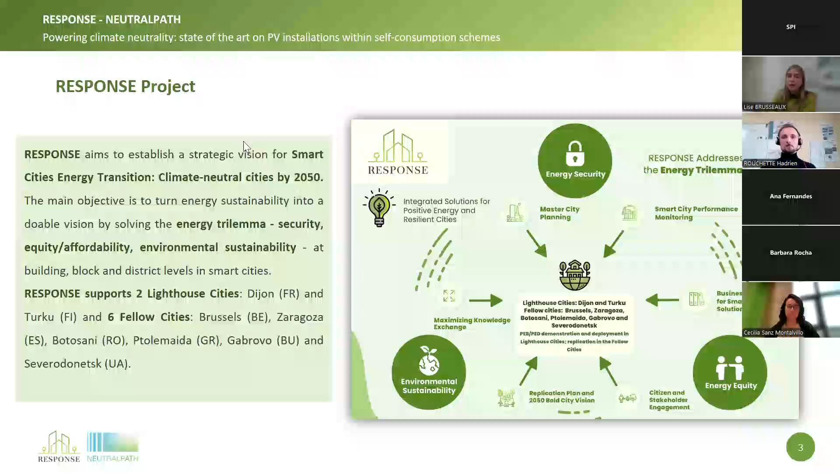Now I will very quickly give you an overview of the two projects to give you a little bit of context. So first, the Response project takes a comprehensive approach to urban transformation, addressing energy systems, digital tools, and citizen engagement. The project started in October 2020, and it supports 54 partners in 13 European countries, including 2 lighthouse cities, Dijon in France and Turku in Finland. These are 2 demonstration sites which test innovative solutions for the implementation of PEDs.

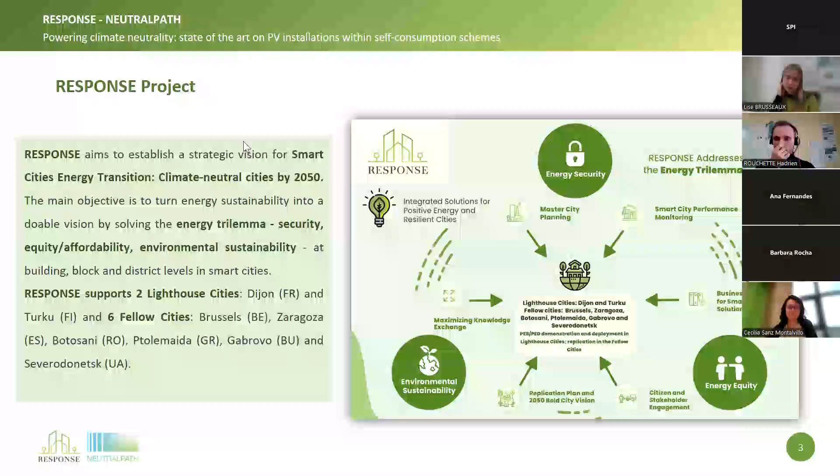It also supports 6 fellow cities: Brussels in Belgium, Zaragoza in Spain, Botoșani in Romania, Ptolemaida in Greece, Gabrovo in Bulgaria, and Severodonetsk in Ukraine. These cities will make replication plans based on the experiences of Dijon and Turku.

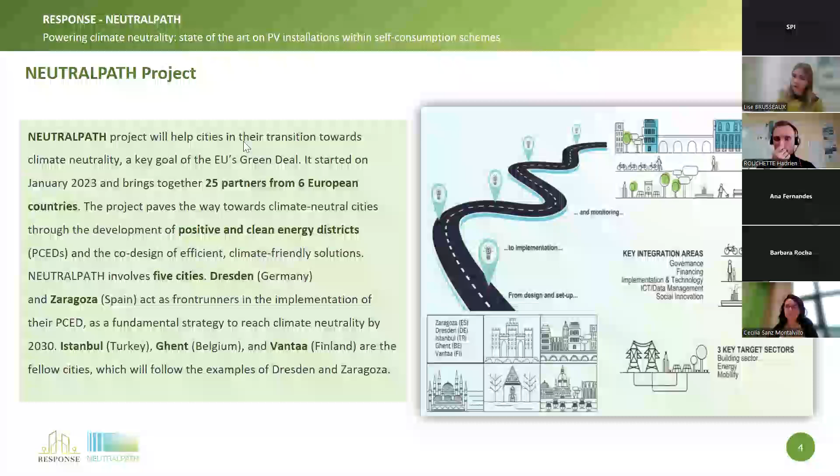We'll also hear today about the Neutral Path project, which focuses on enabling cities to transition toward carbon neutrality by creating PCEDs. As with Response, the project combines cutting-edge technology, urban planning, and community involvement to create practical solutions and reduce emissions while improving quality of life. The project started in January 2023 and brings together 25 partners from 6 European countries.

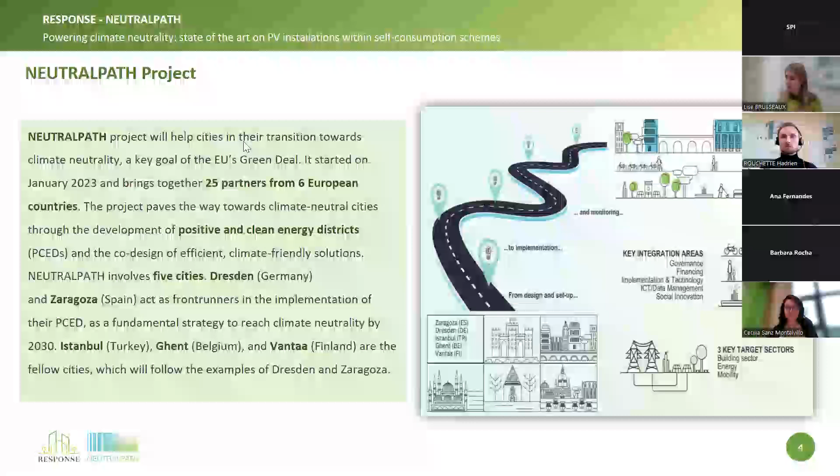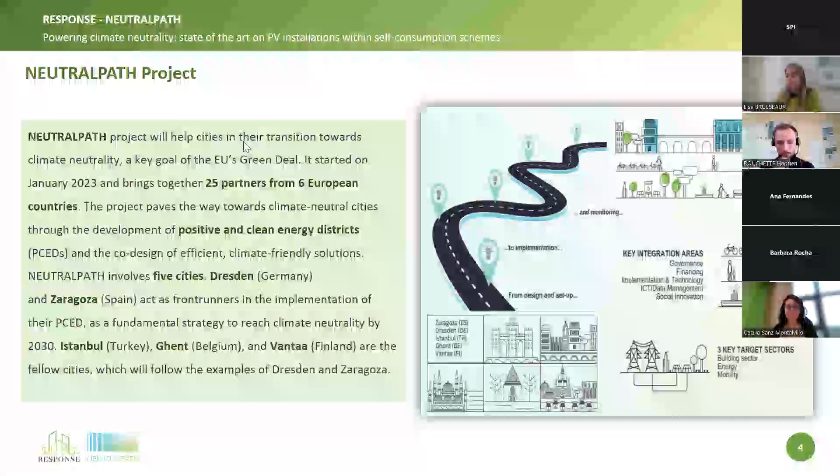It supports 5 cities: Dresden in Germany and Zaragoza in Spain are the pilot sites, the front runners in the implementation of PCEDs in this project. It also supports Istanbul in Turkey, Ghent in Belgium, and Vantaa in Finland, the fellow cities, which will follow the examples of Dresden and Zaragoza in the frame of Neutral Path. So that's it for me.

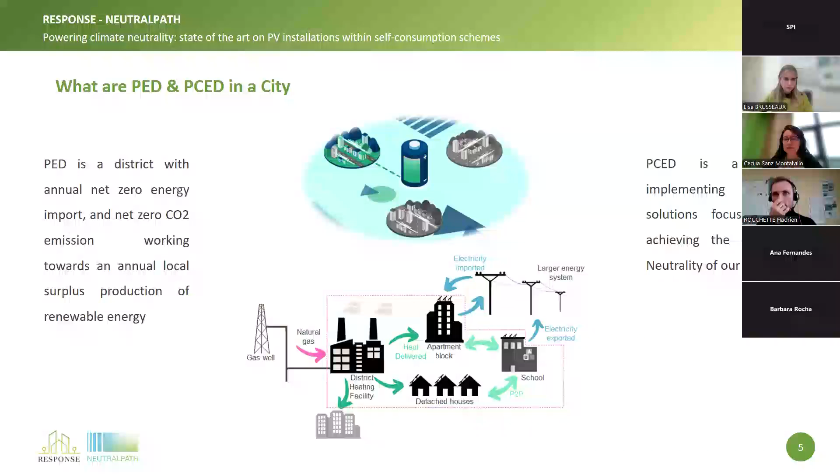Our cities could have or should have been thinking in these commitments with the Commission on it. So this climate neutrality is helped by our PEDs and our PCEDs, because we use clean energies for these districts. The positiveness of the districts should be achieved with renewable energy sources.

So this reduction of fossil fuels contributes to climate neutrality, and also the PEDs themselves, as their surplus can be used by other districts that could not implement this kind of clean solutions, also could help the neutrality of our city. So maybe in the future we could talk about positive energy cities, but for the moment we are talking about these positive energy districts. And this has been what our cities have done.

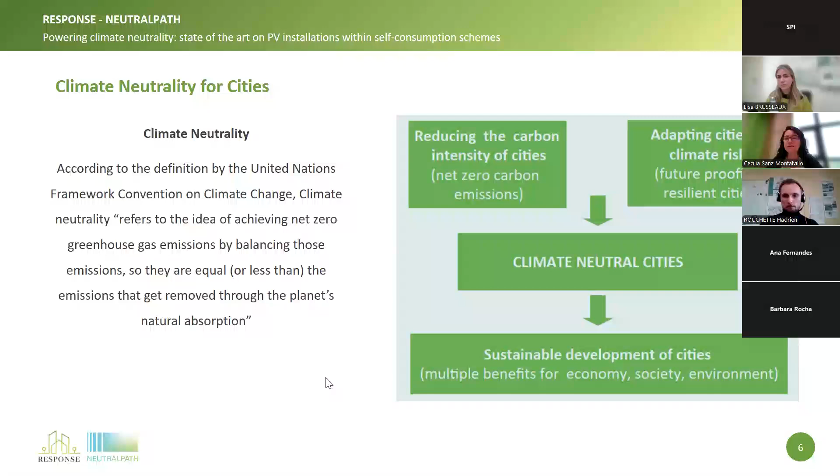Next slide, please. And for talking about how our cities have worked, we have today 3 speakers, all of them focused on PV solutions, because surely solar energy is one of the main energies to be considered in these PEDs and positive energy districts. And we will have Clara Lorente from CIRCE and from NEUTRALPATH from the Zaragoza side talking about how these PV solutions have been integrated in the city.

Later, we will focus on the Turku experience with Hugo Huerta about how this energy can be managed, so apart from being installed, it can be managed with other energy solutions. And later, with Hadrien Rouchette from Dijon métropole, we will talk about how we can replicate in other parts of the cities what we have done in one of the districts. So this would be summarizing what we have done. So now I would leave the floor to Clara Lorente to talk about the experience in Zaragoza.

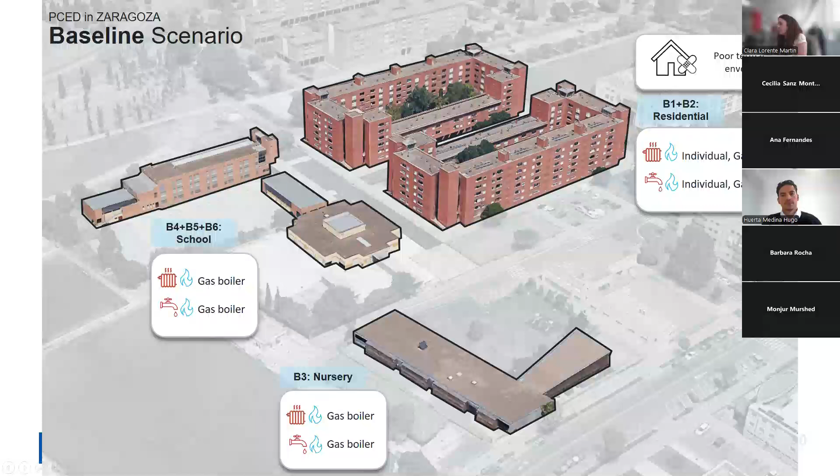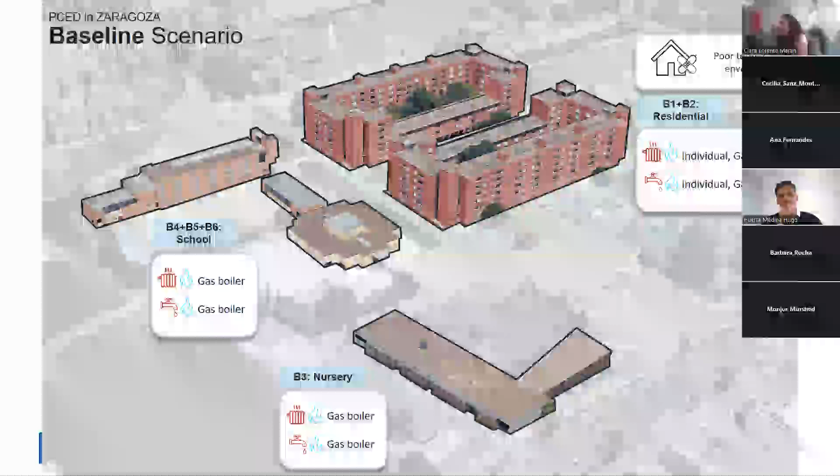I will begin with a short overview of the district. In Zaragoza, we have 6 buildings that are part of the district that is going to be positive and clean. Nowadays, all the buildings are provided with gas for heating and domestic hot water services. We have 2 big residential buildings, one school that is composed of 3 buildings, and then we have a nursery, and all of them are now provided with fossil fuels, with gas. So our intervention, next slide please,

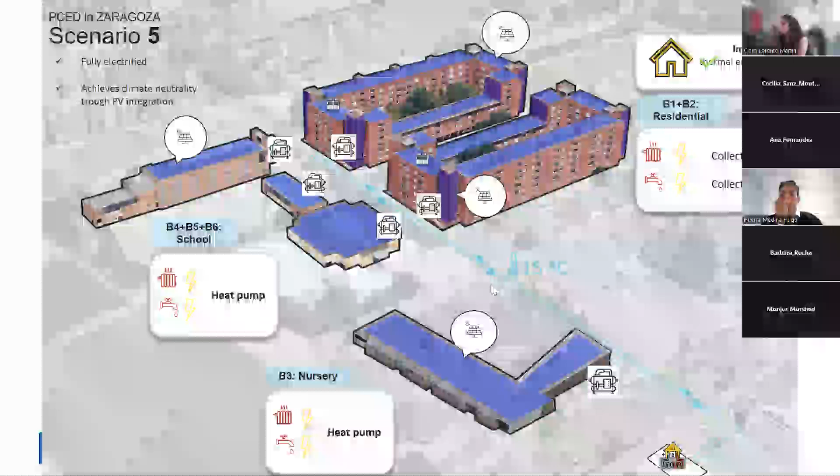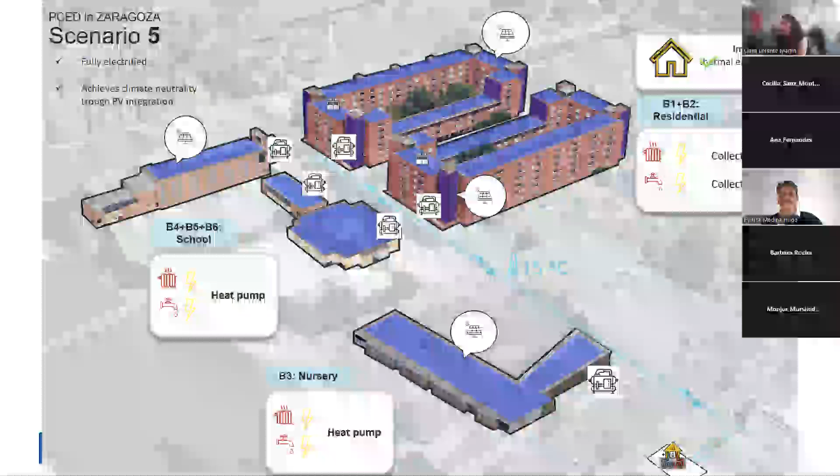focuses on first changing the energy sources to an all-electric district. And to achieve this, we are implementing a district ring that is geothermal. So we are taking water from the soil and then using it as a source for heat pumps that are water to water, and that way we can provide heating and domestic hot water for all the buildings in the district.

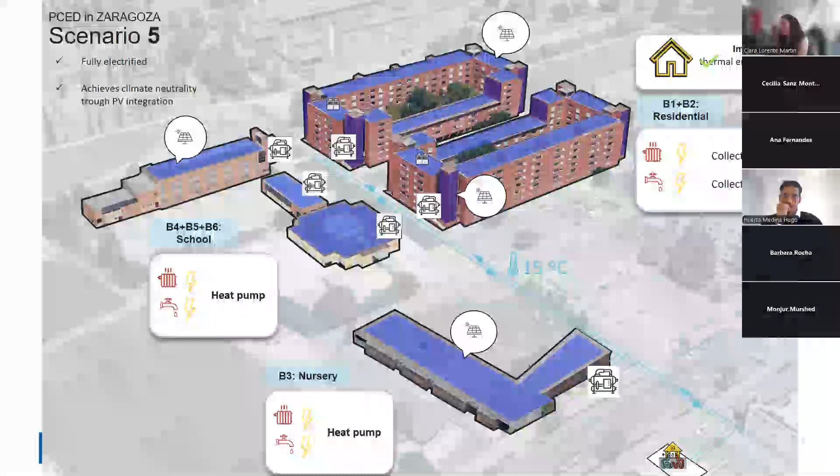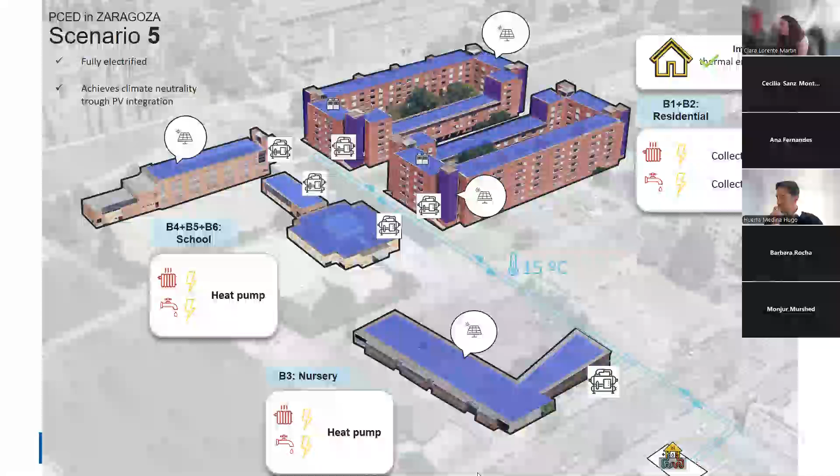These electric heat pumps will be using the energy that is locally produced in the PV panels that will be placed both on the roofs of the buildings that are part of the district and also on the facades of the residential buildings, the ones that you can see in the upper part of the image. Those are the red buildings. And this PV integration, the most interesting part, I think, is the PV that is integrated in the facade. So I will focus my next slides on this. Next, please.

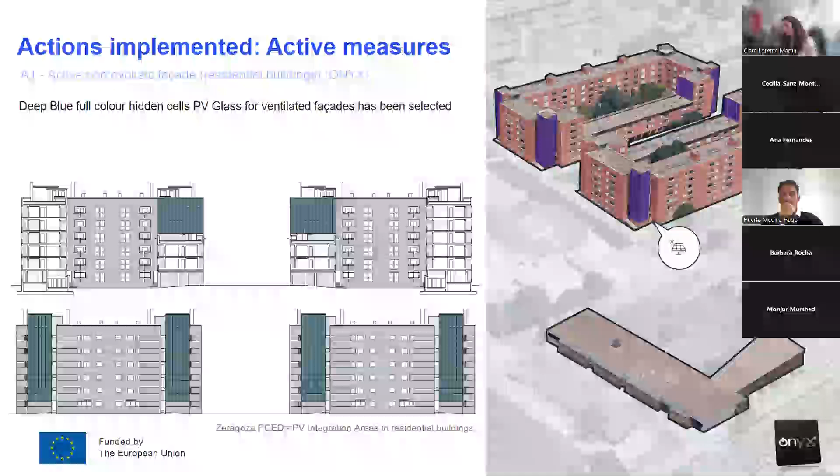Yes, so the PV integrated modules are part of the new facade of the building. We are using PV panels that are provided by one of the partners of the NEUTRALPATH project, that is Onyx Solar. The action is to install these panels in a vertical position in the facade of the building, and the placement for these panels has been chosen in very specific parts of the buildings where this is technically viable and aesthetically appropriate from the owner's perspective. And the panels are, next slide, please,

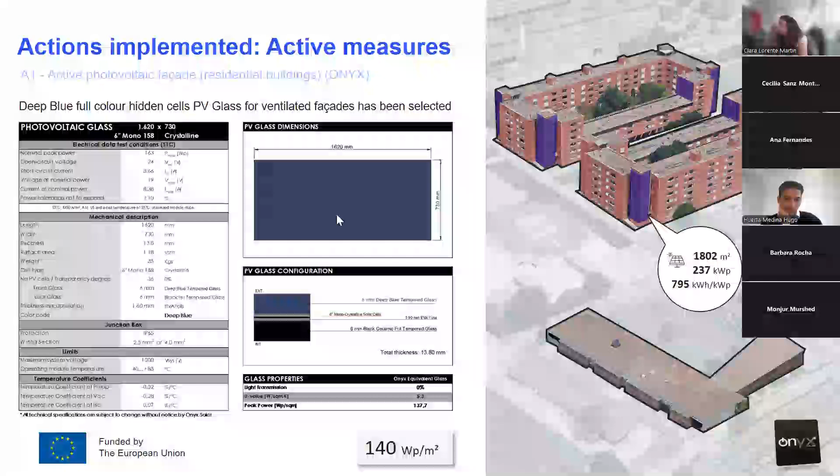a commercial product that is prepared to be installed as a ventilated facade. This here is the technical sheet of the panel. It mainly has a power per square meter of 140 watts per square meter, and in total we are going to install 1,800 square meters in all the building, which will make around 800 kilowatt hours throughout 1 year. You will see that for this specific building, it has been chosen to install the panels on every side, and not only on the south facades.

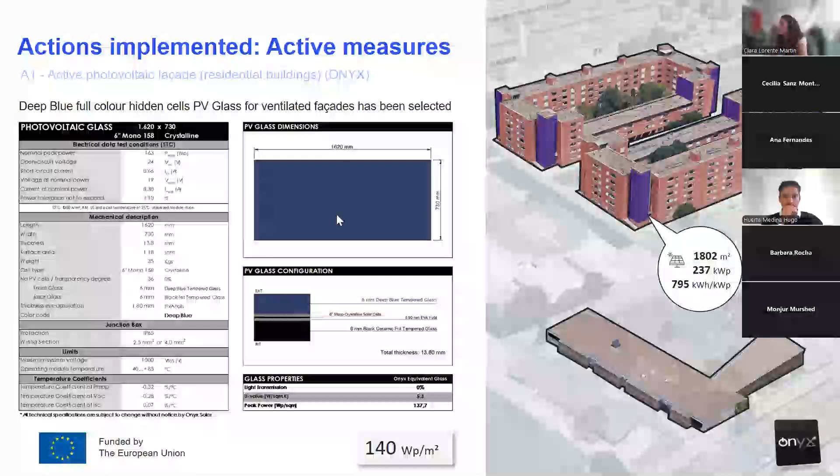And the reason why is mostly the architectural integration of the panels. So we will assume that some of the panels will produce more power than others. But this has been decided because architectural integration has been an important part of the solution. Next slide, please.

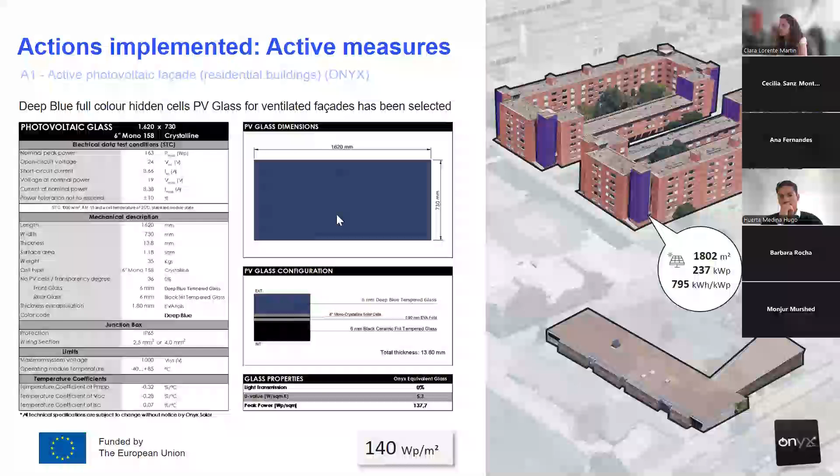Why should this be implemented? Well, these kinds of panels allow for an innovative ventilated facade solution that can combine electricity production with a facade element. So if you choose this kind of technology, you can adapt and install this kind of renewable solution into an element that otherwise you would need to install anyway. So you are solving two things with only one product.

So that way we can combine facade finish and electricity production, and fewer materials are needed. So we have a relatively lower embedded carbon footprint. And also these panels can allow things like shading on the thermal envelope, which is really important in southern countries of Europe. This can reduce cooling demand up to 50%. This depends, of course, on every building, but this is one of the main things that are interesting.

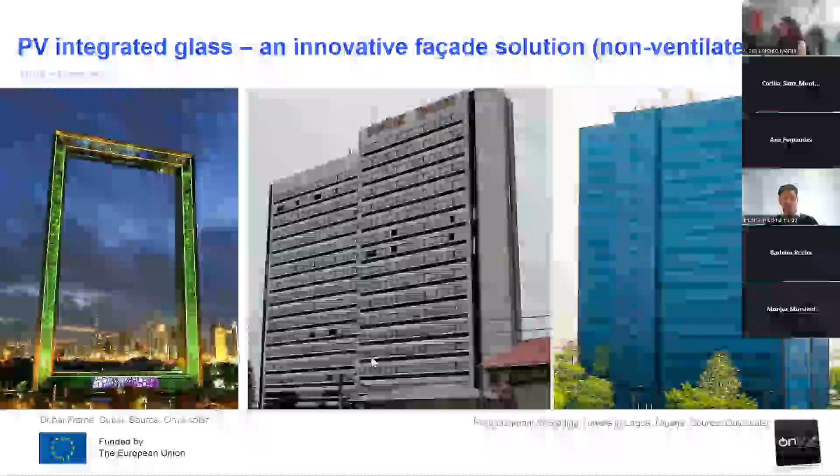This kind of PV facade can also be integrated as a non-ventilated facade, and here we have some examples of this. For example, the Dubai Frame building has this kind of facade that is also photovoltaic, and it can also be used as a refurbishment option. For example, we have here an example in Nigeria that was used to refurbish an office building. And next, please.

Now focusing on lessons learned and challenges. Well, we had here in Zaragoza an emblematic building. It is not protected in terms of heritage or anything, but this was designed by well-renowned architects in the region, and there was a concern about how to place this kind of facade in this emblematic building that has a special use of brick. The architects and the building owners reflected widely about this, and finally it was decided to place the PV panels in these towers located in the four corners of the building, which contain a stair. Please, next.

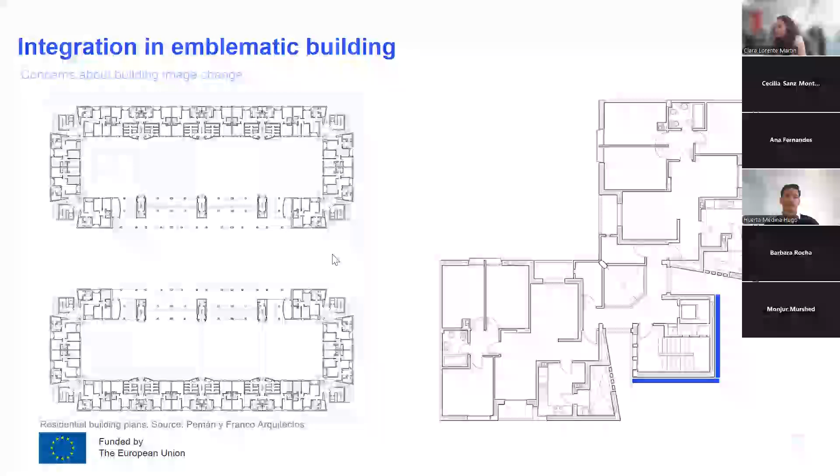We have here the floor plan of the building, and then a zoom of one of the corners. So you can see that these corners contain a stair and an elevator, and have two walls that have no windows. So the architects decided to place the PV panels in those corners that were a singular part of the building, and that way we allowed for the installation of this innovative PV solution in the easiest way to maintain the overall look of the building without interfering with it a lot. Next slide, please.

Another thing that was seen was that it was complicated to allow correct integration with the existing windows if the PV panels were placed on one of the facades that had a lot of windows and terraces. So by installing them in the parts that had no windows, this was easier.

Another thing that was challenging was that, as this is provided in the context of a European project, the PV glass manufacturer only provides the photovoltaic panels, but does not install the solution. An external structural solution is needed to install the panels, so we need to find who is going to provide this structural solution. We also need an installer for the ventilated facade and an electrician that installs this kind of solution, which, as it is innovative, is not common to find.

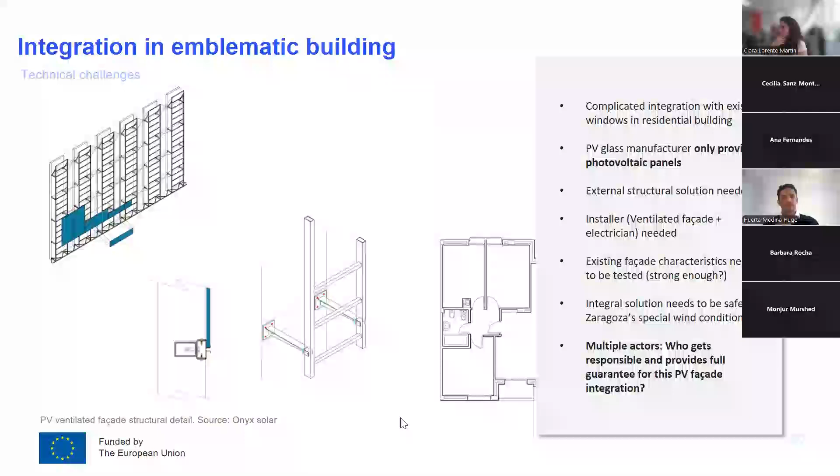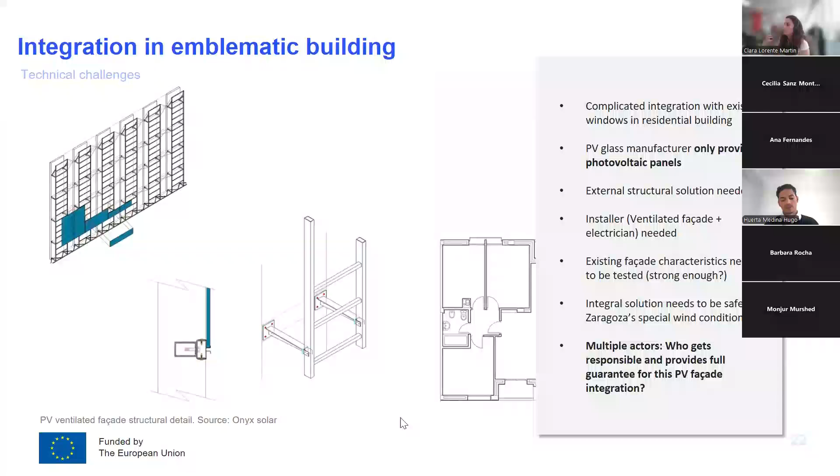So all the facade solution needs to be strong enough to be placed in a really windy city. And also, as you can see, there are multiple actors involved with this PV facade. So the owner and the architects have concerns about who will be responsible and provide full guarantee of this PV facade integration. So yeah, mostly it is this.

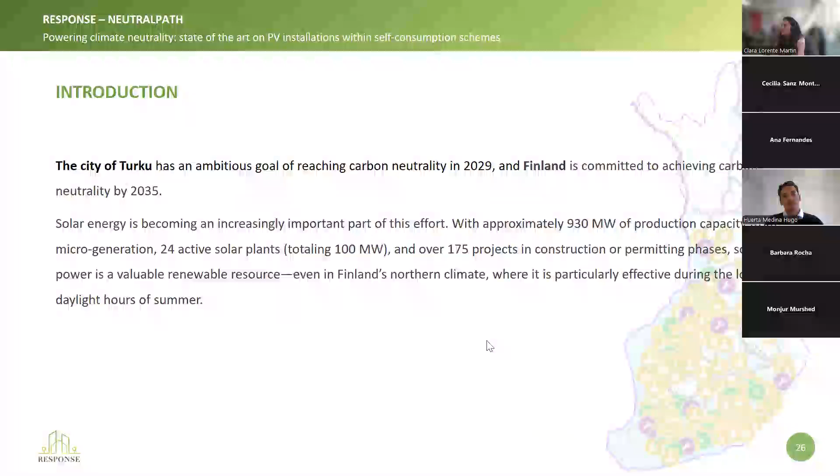So first about the city of Turku. The Response project had a big impact in these terms, because the goal of the city is to reach carbon neutrality by 2029, and Finland is committed to achieve it by 2035. And in order to do this, we have to look at solar energy, which is important in terms of the amount of energy that we can produce.

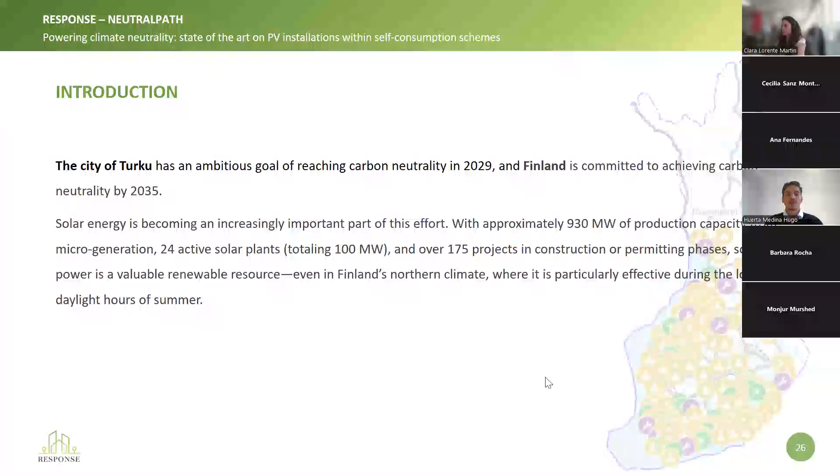Finland is a Nordic country in which you might think that solar energy is scarce, but it is a fact that we have the same amount of solar energy produced during the year compared to the north of Germany. Important here is that most of the production is during the summer months, when we have very long days, up to 19 hours of sunlight in a day.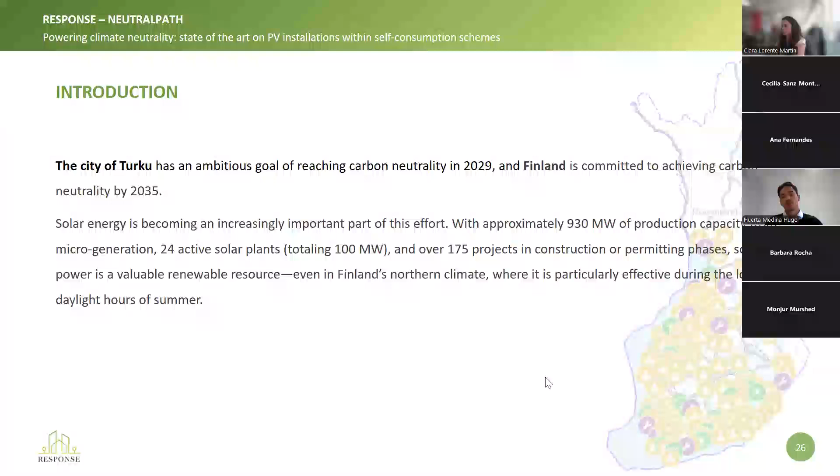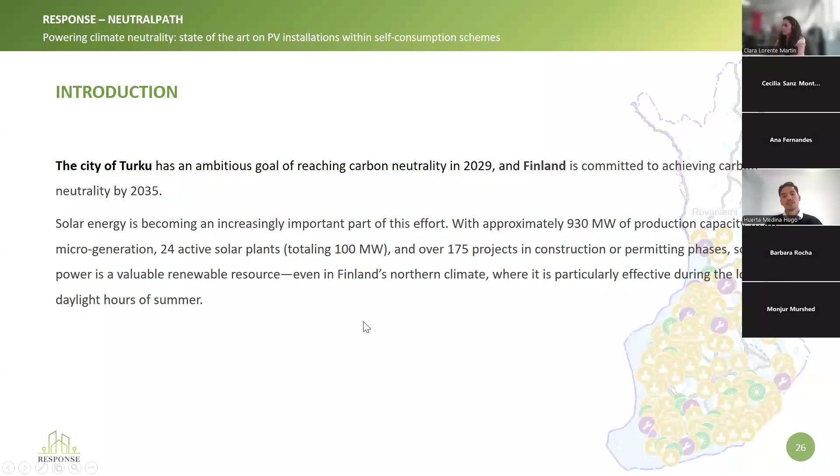Nowadays in Finland, we have approximately 1 gigawatt of PV production, mainly from microgeneration, basically small systems connected to the grid. However, there are 24 active solar plants, which total about 100 megawatts. And more important is that we have about 170 projects in construction or permitting phases, which will allow Finland to reach the gigawatt scale needed. Next, please.

Not everything is good news when we talk about solar energy. There are many challenges, especially in Finland, when we have very long days, high amounts of solar energy during the day, and very low demand, which is the case when people are not in their places during the summer. So all the energy produced mainly has to be sent to the grid in the best case scenario. So this poses many challenges for the projects in the future.

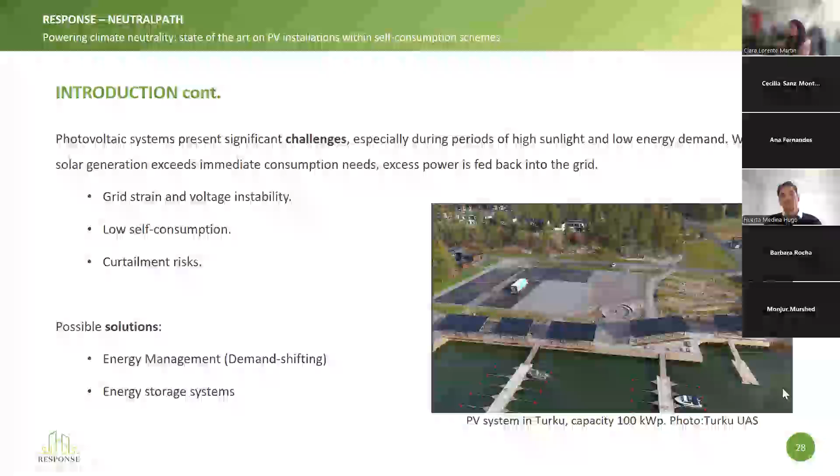And of course, in the cases where we have to send back the energy to the grid, this will cause grid strain and voltage instability, because solar energy is produced depending on the weather conditions. If it is cloudy, it is always fluctuating, and so on. So when there is a lot of production and it is not in use, the self-consumption percentage is quite low, and in the future this means that we have to curtail that production if there is no other place where we can use it.

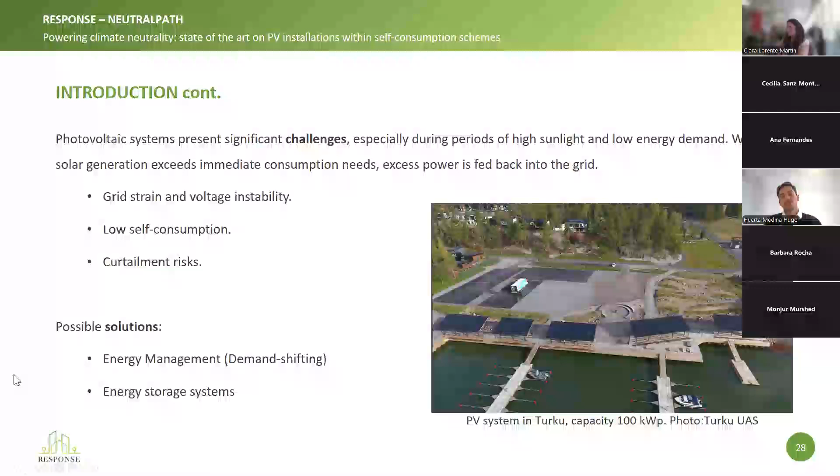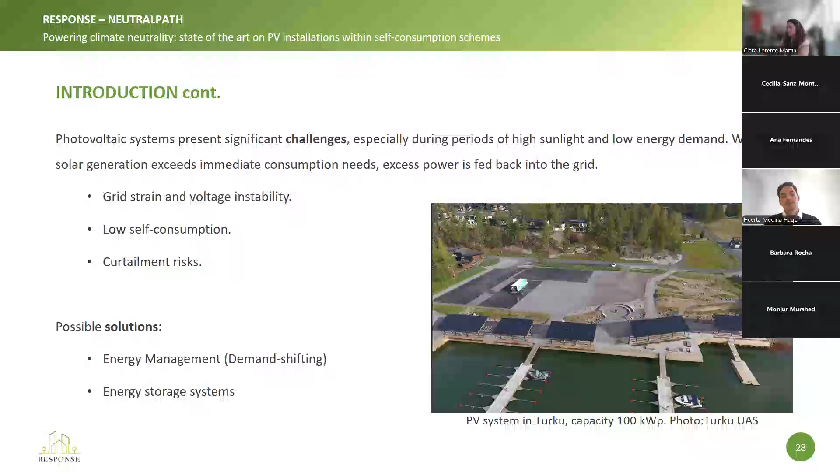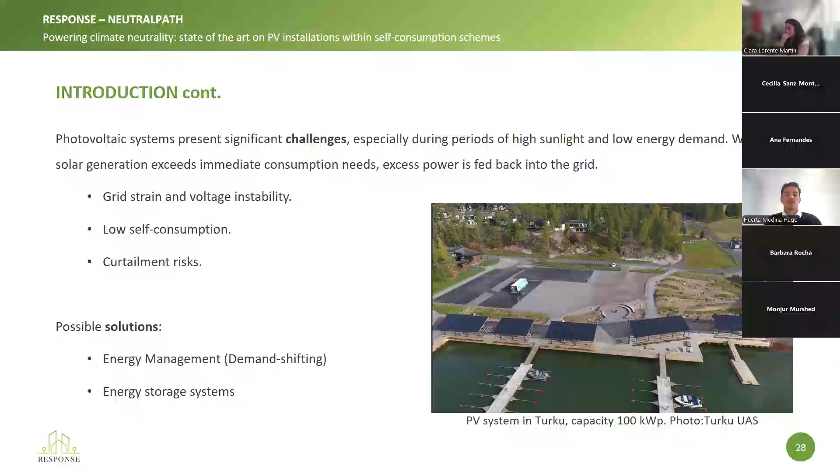So solutions for these problems are mainly related to how we manage this energy, how we can change the way we use the energy produced, basically changing the demand profiles in order to increase the self-consumption percentages. Another solution is to implement energy storage systems, which are still costly, and mainly they just cover a few percent of the total production. So there are many challenges we have to consider when thinking about adding more solar power into our systems. Next one, please.

And part of the solutions, as I mentioned, is the energy management. Energy management systems are computer-based tools which help us to optimize the energy use basically at any scale. It can be from housing level, commercial buildings, and all the way to industrial operations. They allow us to basically monitor the energy production, control it

based on our consumption. When the energy management is implemented, all the data is available, and therefore you can do evaluations in order to optimize your system, make it more efficient and reduce costs. When we integrate the photovoltaic systems, we add clean energy into the energy mix, and then we have more systems that require monitoring and controlling.

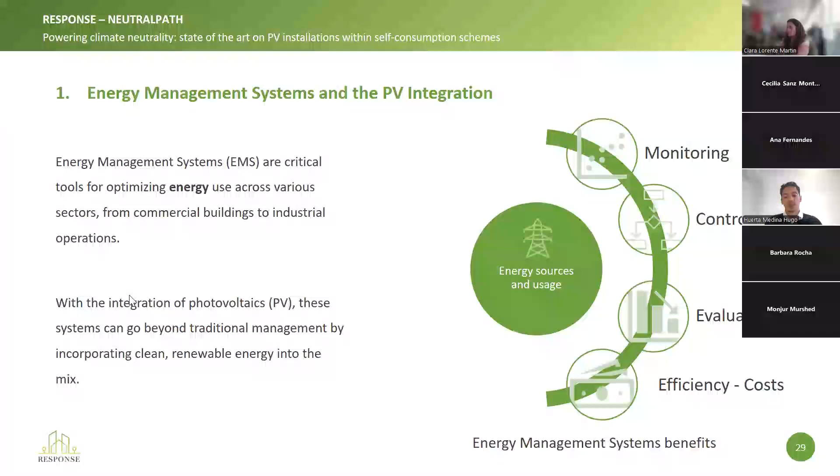So next, please, transition. Okay.

So when we have this solar energy integrated into these systems, of course, we will maximize the benefits, and we are going to have more resilient systems, and therefore, of course, increase the sustainability of these systems.

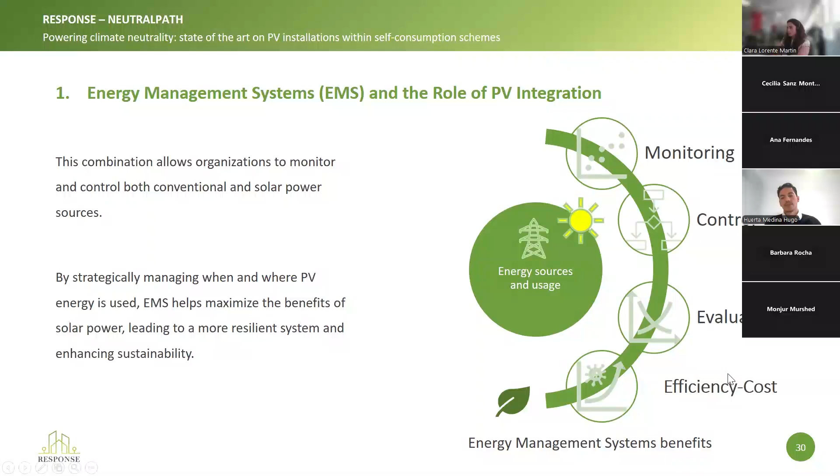So another important thing that we have to consider here is how we can maximize the PV generation in order to boost the energy efficiency. And this can be done mainly when we optimize the design. As our colleague just mentioned, there are many ways in which we can implement the solar systems. In this case, for example, we are just talking about rooftop solar systems. That's the one depicted in the slide. But also you can consider facades to change the production profile, basically.

So this means that, of course, we have to optimize the orientation, the tilt angle, and in general, the full system. But also it's not just about thinking about how much we can produce, or that we have to maximize the production in the zone or in the building. We have to think also about how to maximize your self-consumption. Basically, the energy that you produce at the site must be consumed.

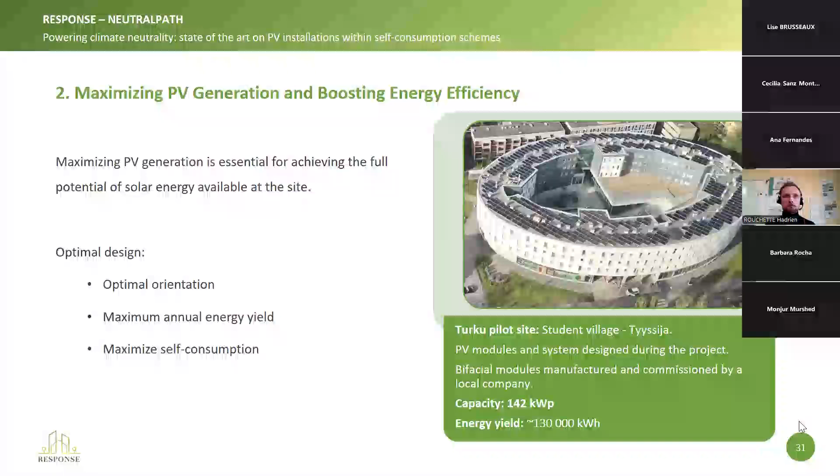In this case, for example, in the Turku pilot site, the building that is used is this student village, basically a mixed-use building with about 200 apartments for the students. It includes a gym, a store, and a restaurant. So basically, consumption demand is high, and it has a specific load profile that we were using in order to do the design.

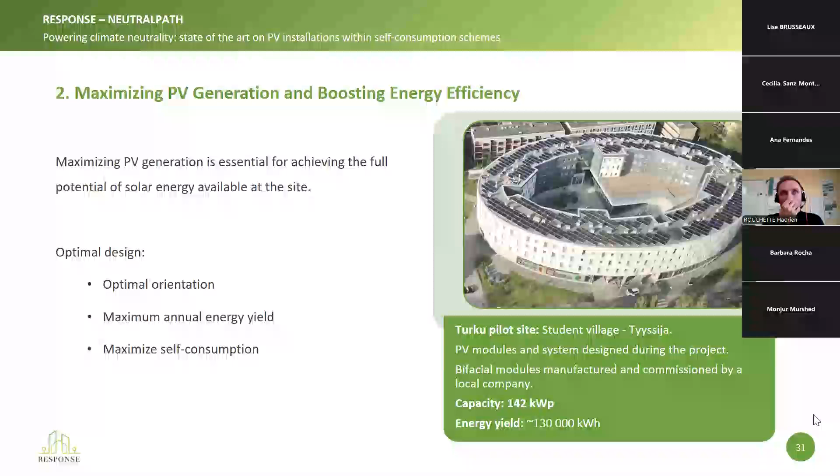The PV modules here were designed by a local company, mainly based on bifacial cells, and they were also manufactured and commissioned by the same local company. The total capacity of the building is about 142 kilowatt peak, and the estimated energy yield is about 130 megawatt-hours per year.

Okay, next slide, please.

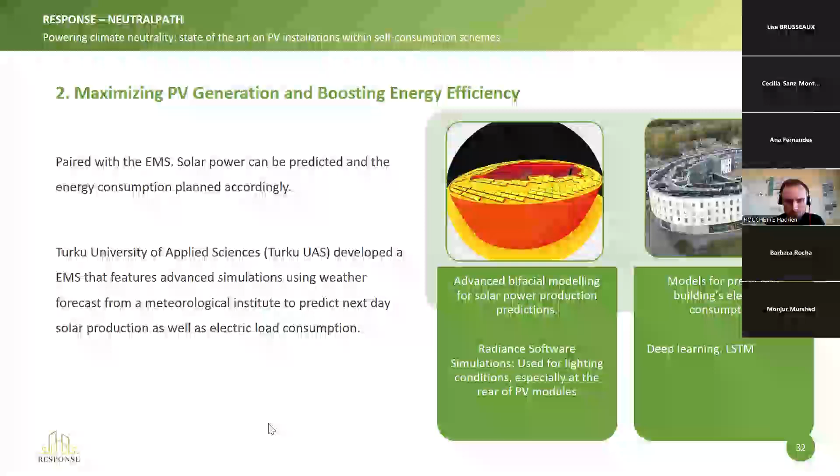So another thing that we were considering during the project is not only optimizing the design and maximizing the production and self-consumption, but we also wanted to go further by adding to the energy management system, which we're going to see in more detail, two features, like the prediction of the PV production for the next day.

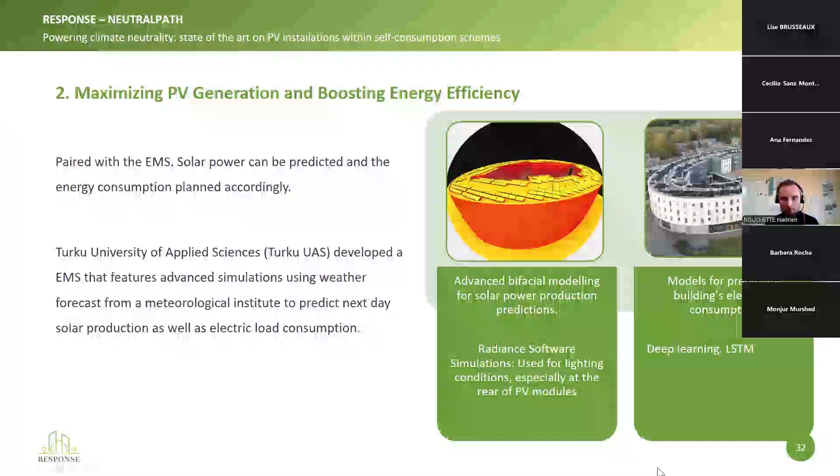And for that, for example, you can see in the first figure to the left a representation of the model that we have of the building. It's a very advanced model in which we are using data from the Meteorological Institute, which basically provides us the irradiation and the weather data for the next day. So we can predict what the energy production is going to be.

And we combine it with another feature that we have integrated into this system, in which we try to forecast the consumption of the building for the next day. For this, basically, we need historical data to predict the next day consumption and train the models, and of course, the challenge is that for new buildings, you probably don't have that data to train your models.

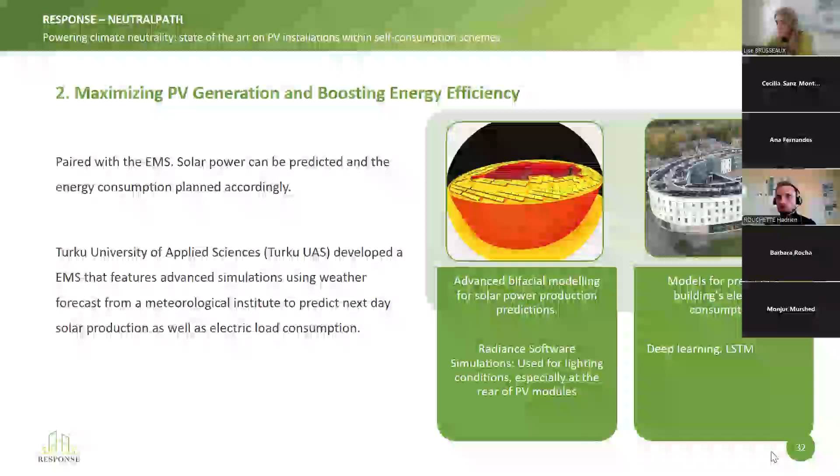But as we collect data, we are improving the models in order to come up with better results. So next one, please.

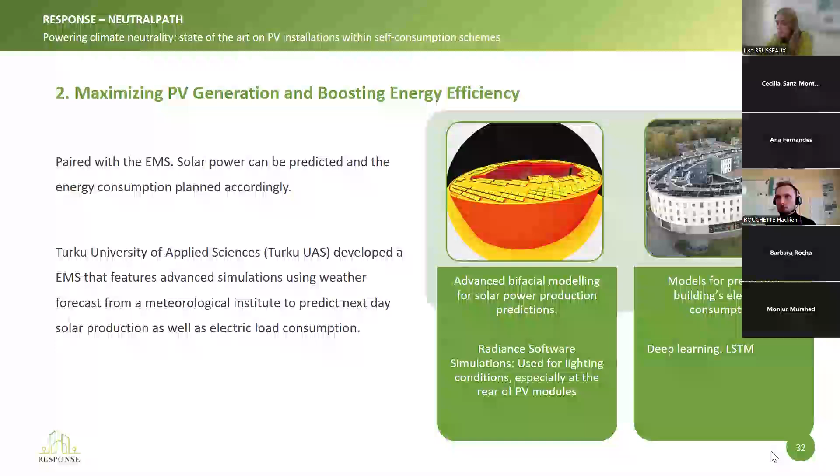So with this, we can enhance, of course, the self-consumption when we know what we are going to produce and what we are going to consume. And with this, of course, we are going to reduce the energy demand from the grid. And of course, we are going to reduce all those problems related to selling or sending back electricity to the grid.

But still, we need more systems or more solutions to be integrated in this case, because we still have the problem about overproduction. So another solution is, of course, to include energy storage systems and also share that extra energy that we are producing locally with the buildings at the site or neighbor buildings. So this is part of the project as well. Next slide, please.

As you can see there, the 4 retrofitted buildings have their own photovoltaic system, approximately 25 kilowatt peak per building. And they have a bidirectional energy hub, which allows you to go from AC to DC, or the other way around. And also a big energy hub on the Tyyssija side. So basically, those energy hubs allow you to do that power sharing between the buildings.

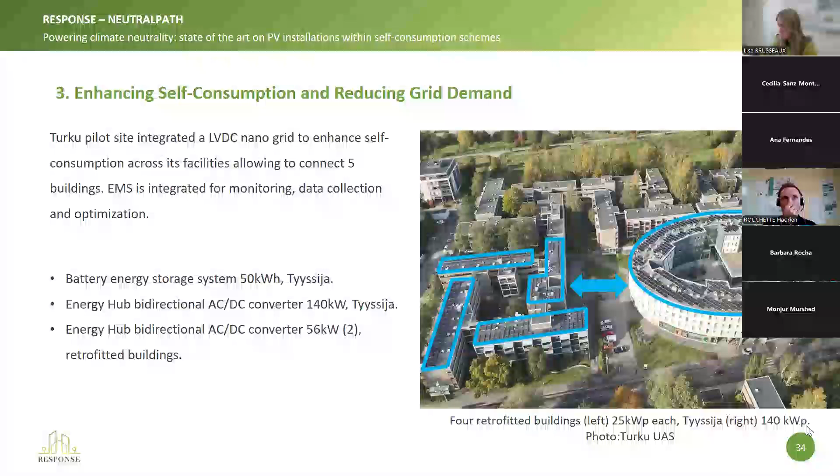And part of the energy management system, which is still under test, as the monitoring phase just started, is to integrate all that I have just described: the forecasting methods that we have developed to create new schedules and to predict how we can control the energy use for the next day. So next transition, please.

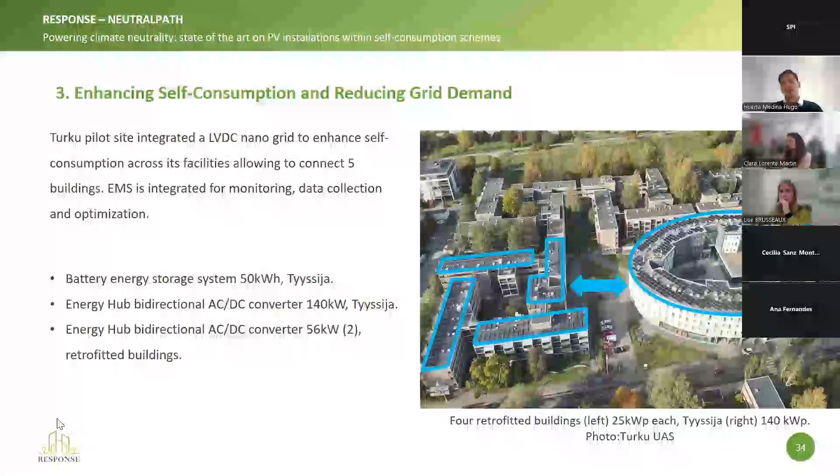And all this physical system is, of course, connected with the energy hubs and a server located in TUAS University facilities. We have the energy management system, which communicates with the energy hub and some of the other separate systems like the buildings. And it retrieves all the data that we are allowed to record and store into databases, such as PV production, weather from the Finnish Meteorological Institute, energy consumption, electricity prices, and so on.

So with all this data, we are able to do the load and solar power forecasting, and we try to optimize the energy use based on all the data that we have available to come up with the energy use for the next 24 hours. Once we have this schedule calculated 1 day in advance, it can be passed to the energy hub, and for example, the battery usage can be controlled based on that schedule.

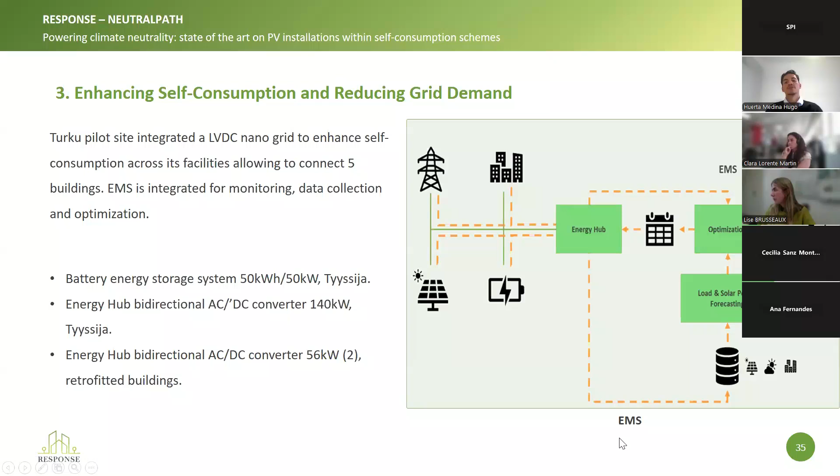And then, of course, if you want to buy or recharge your battery during the night from the grid, for example, if prices are low, that is also possible. So there are many features or capabilities that you can create based on your needs. If you are interested in maximizing the self-consumption, you can do that. Or if you want to minimize the electricity costs, that can be done as well. So next slide, please.

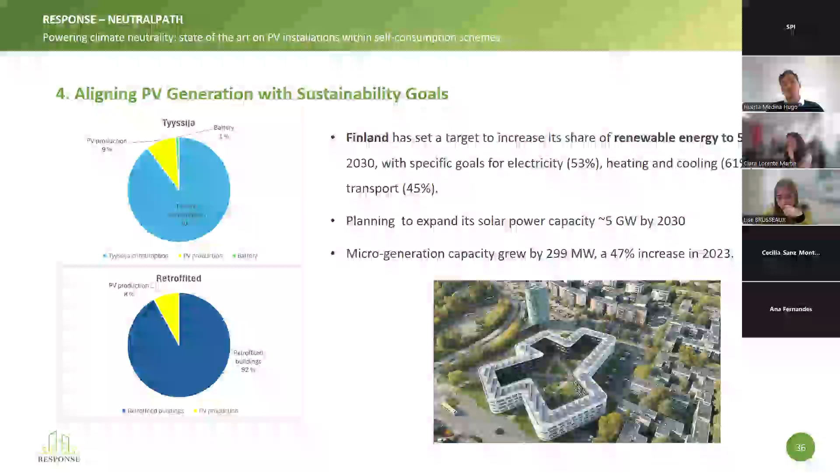And this aligns quite well with sustainability goals. We described some of the goals at the beginning, or the targets that Turku and Finland have. About renewable energy, it is expected that by 2030, renewable energy is 51% of the total. There are some other specific goals about electricity, heating and cooling, and transportation, but those are other numbers that might be related with PV production or new renewable energy production in order to maximize it.

The solar capacity is expected to grow by about 5 gigawatts by 2030. And for example, micro generation, like the systems that we just showed, grew 300 megawatts just in the last year, a 47% increase just in 2023. And the growth is exponential, as we saw in one of the graphs.

This picture that we have here shows buildings next to the elliptical building that I just showed. And this system is also part of the project, and the buildings at the rear. And basically all those buildings already have PV production. So microgeneration will take a big share of the renewable energy production, in this case in Finland.

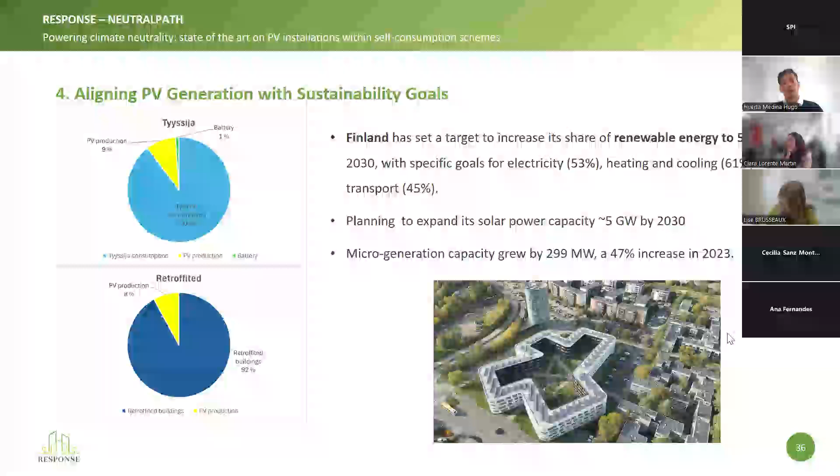So if we think that every single building can cover that amount of power, basically these are really, particularly the Tyyssija building, which has a very big consumption. As I said, it has about 200 residents plus the restaurant and the gymnasium and so on. So we are talking about a power demand of 300 kilowatts when it is at its maximum. So it's a big demand. So if we can cover 10% of that, that's really great. That's a big achievement.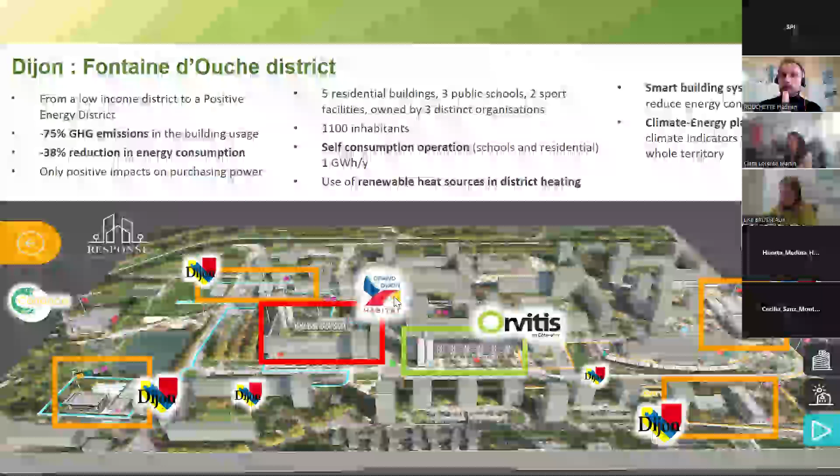Our project in Dijon, which is the Response project again, with the specific conditions of Dijon Métropole. Let's talk about our district first. As you can see, it's a district of larger buildings with several owners. We have 3 owners of the Response buildings: the city of Dijon, the municipality, and 2 social landlords, social housing companies, which are Grand Dijon Habitat and Orvitis.

So one of the specifics of the Response project in Dijon is that we have 3 different owners with 3 different goals and constraints in the scope of the project. What should be highlighted here is that we also have shared knowledge, because some solutions are common between the various buildings of the district.

We will go through not all of them, but we will focus on the specifics of the solar production in those buildings. And in the end, I'd like to give some explanation about the replication potential of the solutions that we have tested in the scope of Response.

Can you show the next one, please, Lise?

So in a nutshell, we have the goal of energy positivity in the Fontaine-d'Ouche district. To this end, we multiply the solutions. As I said, I won't be going through every one of those solutions. I will focus mostly on PV production, but just for you to know, these are not the only solutions that we have. In particular, the rise of renewable energy production is half due to the electricity PV production, but also half due to the renewable heat production.

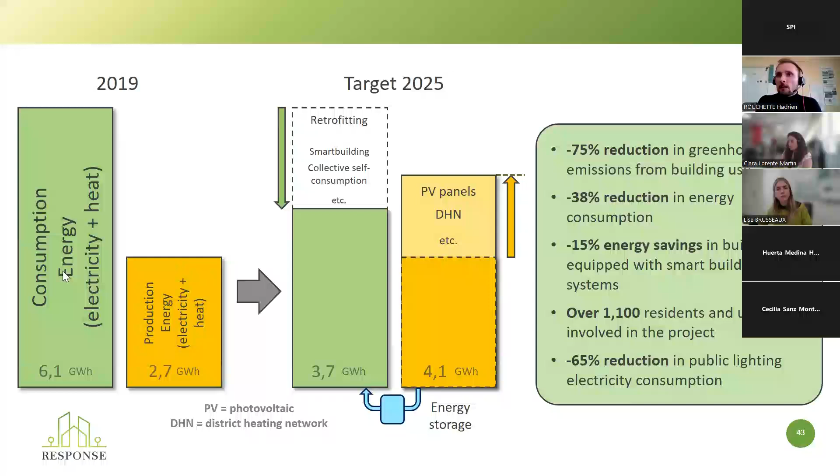Next, please, Lise. I'd like to give a few indications about our works regarding the solar production in Dijon. So first, start with the city-owned assets, which are mostly the schools and the stadium. Those are not the only ones, but those are the ones on which we have PV power, which will be used in the scope of self-consumption. So it means that the electricity is as much as possible consumed directly in the building on which it is produced, so the schools or the stadium.

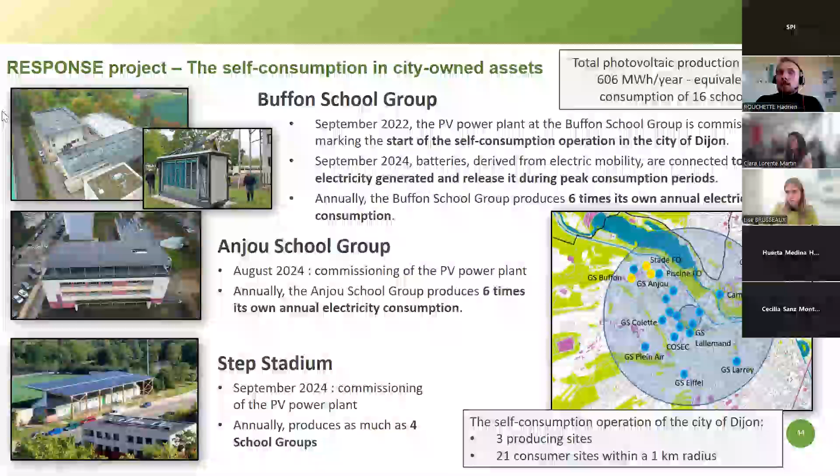But as you may have noticed, the PV coverage of those buildings is large. As a consequence, those buildings will produce much more than their electricity consumption during the whole year. So for the schools, it's 6 times their own consumption, and the stadium produces many times more than it actually consumes. So as a consequence, those surpluses will be shared. They won't be sold. Instead, they will be shared with other sites.

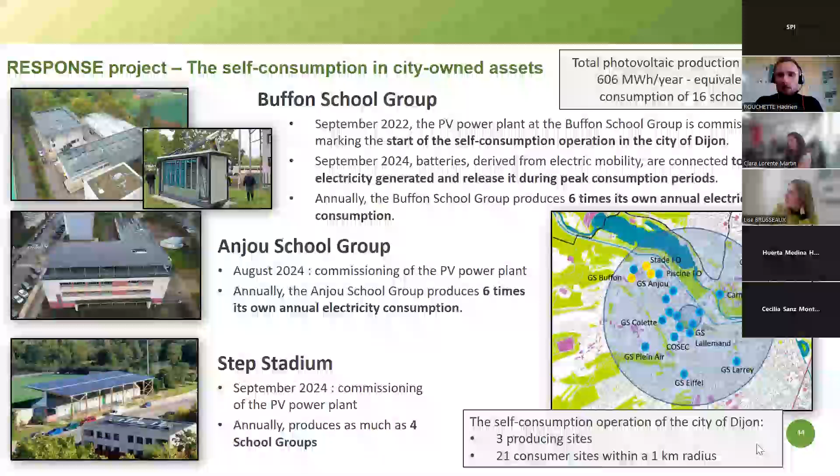And as you can see on the bottom right, those sites which have the same owner, so the city of Dijon, will be able to consume this excess production of electricity on those 3 sites, and to be shared with 21 other sites, including the swimming pool, for example, or other schools. So it is a good thing for the savings of the whole city, not only of the schools inside the district. Can you show the next one, please, Lise?

In order to reach the energy positivity, we also have other sites which will get PV production, and to this end, we aimed at road and parking sites for which we do not have electricity consumption, and for which we will produce more or less 1 gigawatt hour per year. This is a large production which we wouldn't have been able to consume directly in the local buildings. So those sites are not in self-consumption. Instead, they are in total selling of this electricity to the market.

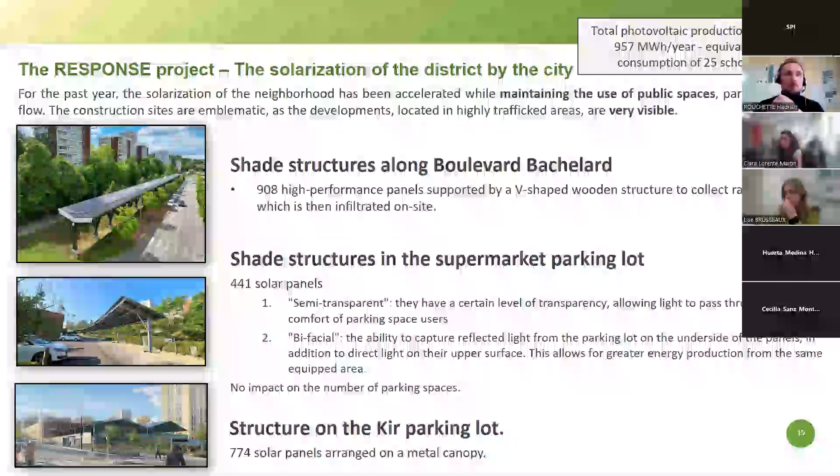So it is interesting to have both, because we have self-consumption for sites which can actually absorb this large production, and sites which are full selling in order to be able to sell it properly without relying on self-consumption. So these are also 3 large sites of the city.

Let's go to the social housing companies now. We have 2, and those 2 have pretty much the same solutions. Again, I will just mention that we have works dedicated to energy savings, both for electricity and heat. But we also have an innovative solution of PV production on both Grand Dijon Habitat and Orvitis roofs. For those, we will have solar pergolas over the roof of the buildings. So 2 buildings of Grand Dijon Habitat and 1 of Orvitis will get those pergolas.

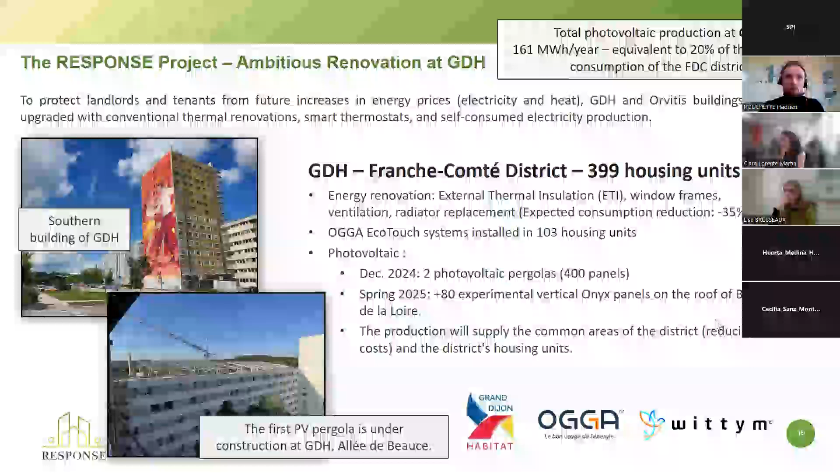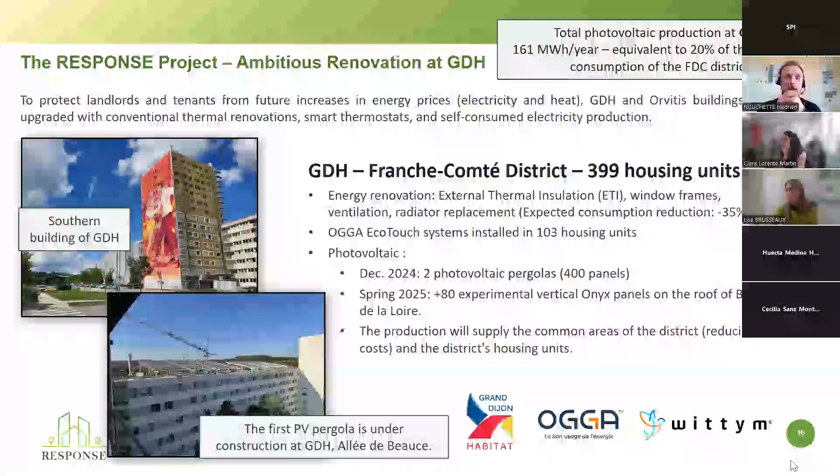They bring us several benefits. The first one is to have the panels located not on the roof, but above the roof. As a consequence, we can have a larger coverage of PV panels, because we are not in competition with other usage of the roof, which is not having a barbecue with friends, but the ventilation systems, the elevators, and so on, which have services on the roof of the building. Those systems would be in competition with the PV panels. In this case, the PV panels are located above, so we can have both in the same place. So it brings more production.

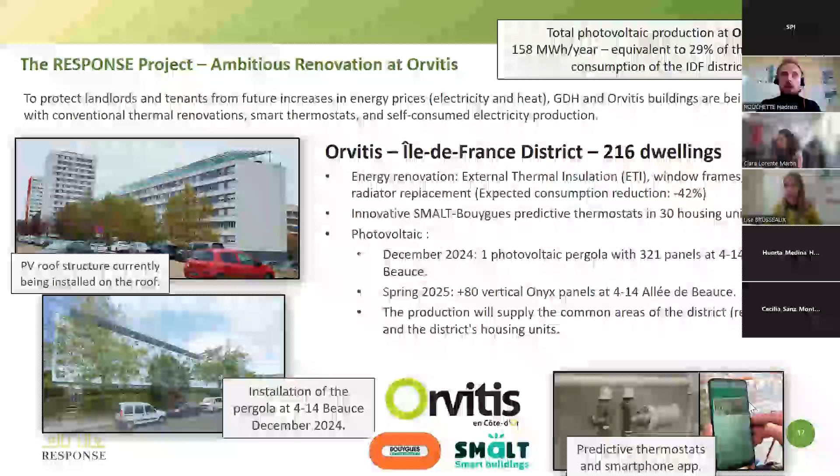And if we can go to the next one, yeah, nice. Thank you, Lise. What I will be saying is true for both Grand Dijon Habitat and Orvitis. The business model is that the social housing companies will be investing in those systems, and those systems will then provide electricity to the common areas of the buildings, such as ventilation, the elevators, the lighting, and so on, of the shared spaces of the building, which will reduce the payments from the tenants.

What is not consumed will also be shared with the tenants for their own electricity consumption inside their dwellings. So they will have two wins: one on their payment for the landlord, which will be reduced, and one for their own electricity bills, which will be also reduced. So they will win on both sides.

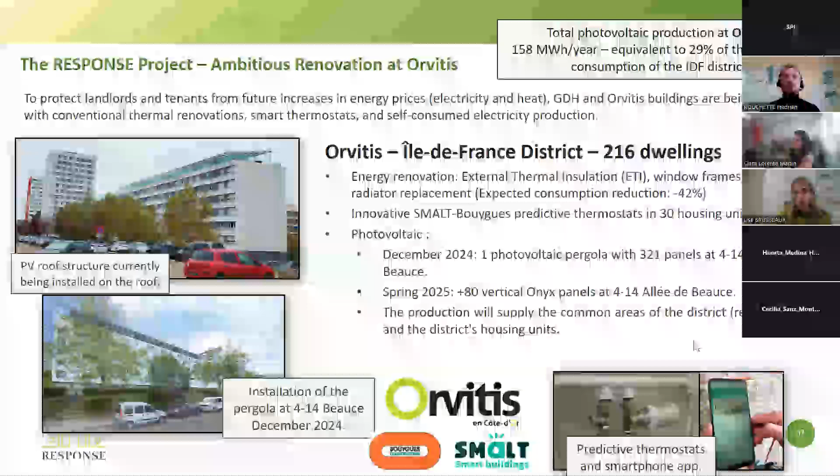Finally, in addition to those pergolas, which are located above the building, we will be able to have 2 strips of vertical panels, which will be tested on the roof of the building of Grand Dijon Habitat and Orvitis, which will make it possible for us to test the efficiency of bifacial PV panels located vertically on the roof of the building.

Can you go to the next one, please, Lise?

Yeah, what we learned from this process was that we have been able to create economically viable systems, which we'd like to then reproduce on other sites of Dijon, and it will be the main subject of the end of my presentation. We'd like to know more about our capacity to integrate the people in the self-consumption operation, but we guess that many people will jump in, as it is a win for them without any counterpart.

And we are testing the system of energy management at the scale of the whole district, and we are starting the monitoring of this system, and we'd like it to be a tool for the future in creating new positive energy districts, and also to manage future positive energy districts in Dijon.

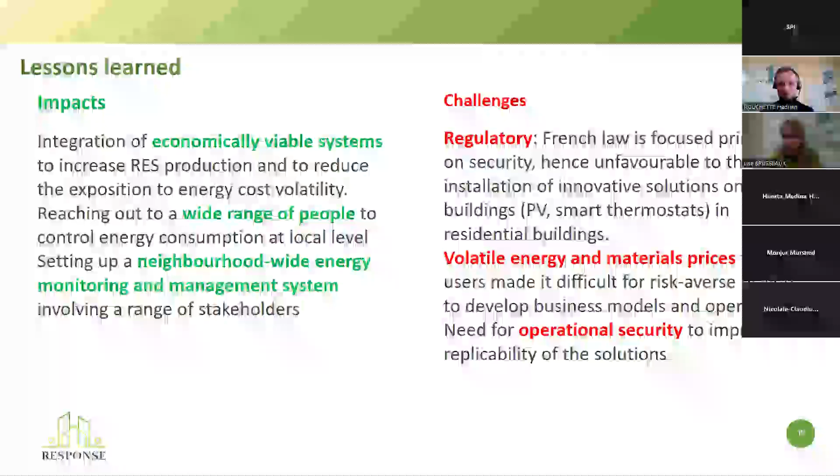Just to give an example, you are putting the PV on the residential building, and the building is probably owned by the city, right? So when you are going to install the PV solutions, what are the mechanisms involved? Is there any need of certification from an authority who says, okay, these PVs are very good and you could put it? Do you need some sort of insurance against that? So could you please explain in this regard?

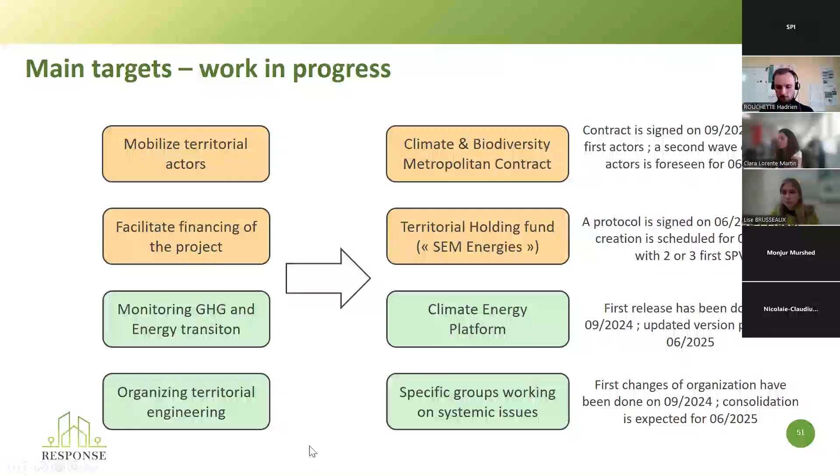Yes, so the PV panels are a commercial product right now. So for the photovoltaic glass, it's all right. It's more related with the practical problem of, okay, we have a provider, but we don't have an installer that provides the constructed solution as a whole. So we need to find an installer that wants to provide a warranty for the building owner of the whole solution of the facade that is installed by them, but the glass that is provided by another entity.

And then we need an installer that is both a ventilated facade installer and also an electrician, because it's a physical element but also an electricity producing element, which needs an appropriate engineer to provide a certification for all that, and so on. And of course the architect is concerned about installing something that involves that many actors, because in the event that there's a problem, it's always more difficult to find who can solve this problem or who is responsible for what went wrong.